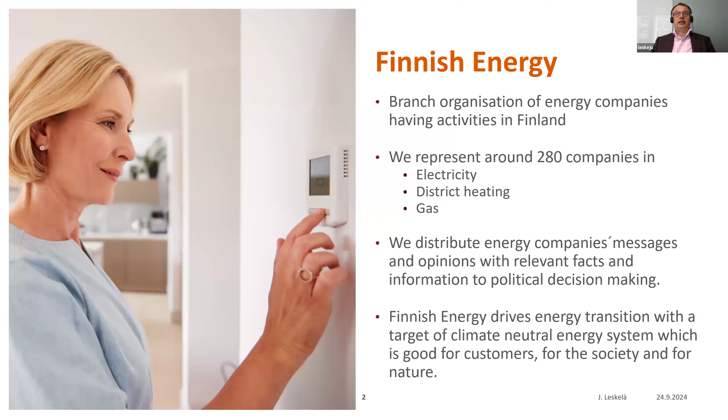As Henna told, I represent Finnish Energy. We are not a company, we are an association of companies having energy activities in Finland—in electricity generation, distribution, sales, or in district heating, or in gas. There are a lot of companies like that in Finland, many municipal, some state-owned, some private. There is a market in these issues in Finland, and we are the voice of this industry in our society.

What we do is we aim at driving the energy transition in Finland so that we will have a sustainable, carbon neutral energy system, and we tell our opinion, or the companies' opinion, to the decision makers in order to facilitate this transformation. I was asked to give a short overview on how we see the energy transition in Finland, what are the steps, and then the other speakers will talk more about waste and the energy use of waste.

But first of all, I really feel honored to speak with Ukrainian colleagues. Our organization fully supports you in your trouble with the massive attack of Russia. We in Finland had a lot of energy trade with Russia—about one third of our primary energy came from Russia at the time when Russia attacked Ukraine in February '22. Now we have cut totally these imports. There are no more Russian energy imports to Finland anymore. I would say Mr. Putin has done this forever, because we are going to phase out fossil fuels before we can have relations with Russia to trade anymore. Nobody wants to have Russian energy back in our system in Finland.

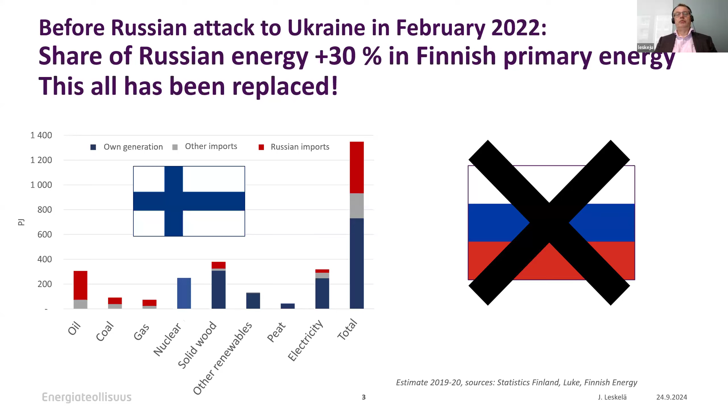Our companies are also providing a lot of equipment to Ukraine, and we are at the moment running a campaign in order to collect as much material as we can find for replacing your damaged energy systems in Ukraine for the next winter. I hope this will help. We understand very well here in Finland what it means if you don't have available energy or electricity in your country during winter, and we really hope you can get things fixed with the energy system.

But to the energy transition—what does it mean? Finland as a country has a target that we should be carbon neutral as a society, as a country, by 2035. So in 11 years' time, which means we still have some emissions, greenhouse gas emissions, but our net sinks—the growth of the forest and so on—will cover these emissions. We are on a pathway to that. It's a very tough target, but our country has taken this kind of target, and our energy industry is fully supporting it.

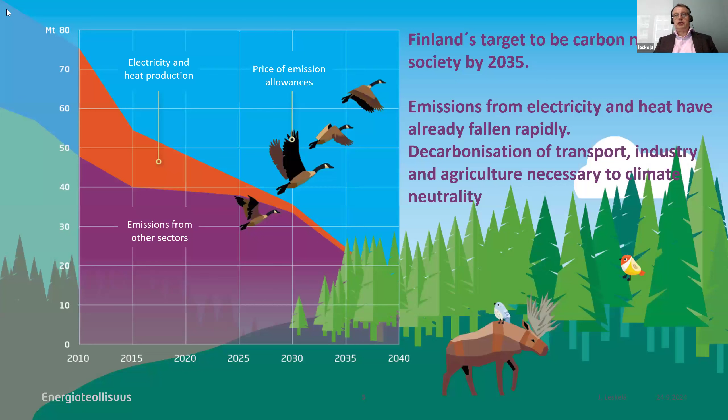Now, here we go. Yes.

How we see the decarbonization of the energy system and getting rid of fossil fuels in the whole energy system, I call it a triple jump. The first jump is to decarbonize the energy production, electricity production, heat production, and that step we have mainly already taken in Finland. The second jump is decarbonizing the energy use, especially in transportation, in industry, and in heating, but also in agriculture and so on.

The method to do that is to electrify the energy use, so that we produce more clean electricity with renewables like wind and solar, or with nuclear, in carbon neutral ways, and use electricity in the energy consumption instead of fossil fuels, like having electric vehicles instead of fossil fuel combustion engine cars, and also in industry.

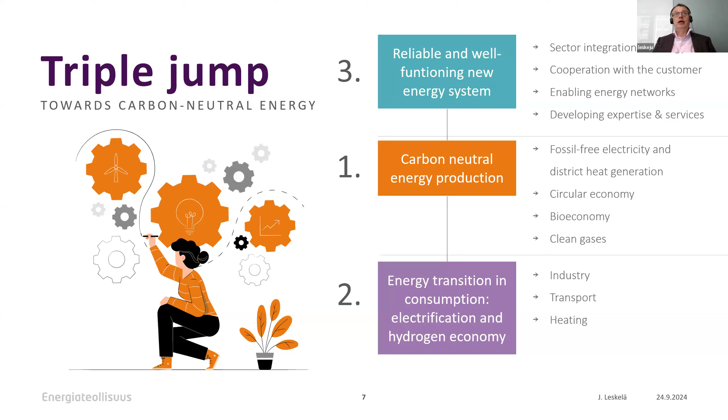And we are very happy with that, but it is still ongoing. Today, the emissions are even lower from the power sector.

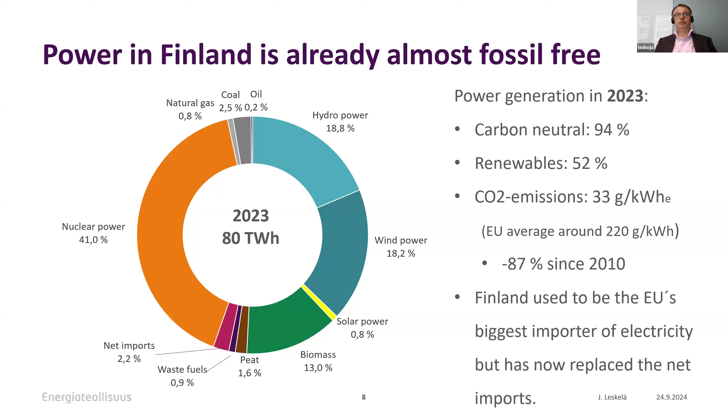And then the heating sector in Finland, the homes, public buildings and commercial buildings, they are heated mostly with district heating systems. Almost half of the cubic meters of all buildings in Finland are district heated. And then there is electrical heating and heat pumps, which both use electricity as a primary energy source. If electricity is already clean, then of course the electrical heating and heat pumps are clean. Then we have a little bit of wood, which is of course renewable, and a small share of fuel oil that will be replaced with other sources.

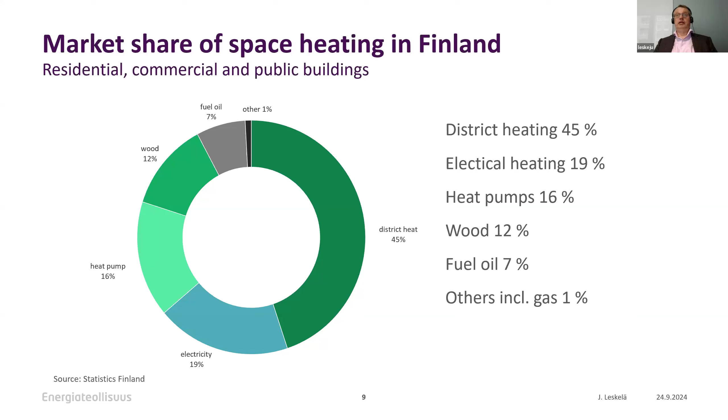And if the district heating will be decarbonized, then also the heat in all Finland would be decarbonized. There is also a tremendous development that has happened during the last decade. We have reduced the amount of fossil fuels tremendously, so that the share of natural gas and coal and oil together is only between 15 and 20% last year. And then we have a little bit of domestic peat, which will also be mostly phased out during coming years, like all these fossil fuels.

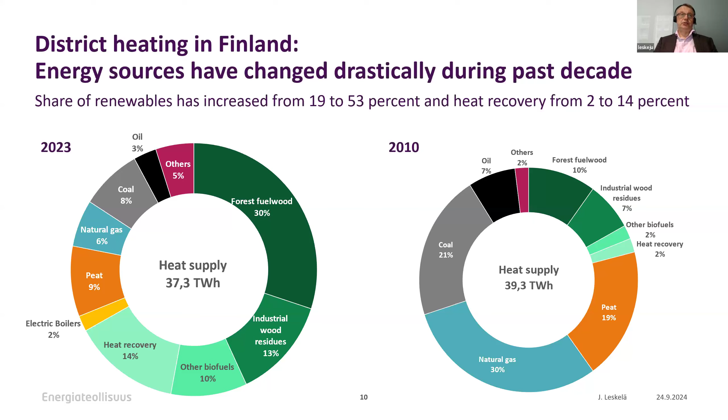And by the end of this decade, by 2030, practically the heating is also carbon neutral in Finland. And then we have clean electricity and clean heat in Finland. These others in the picture are the non-renewable share of the waste incineration, and that shows that the share of waste in our district heating is altogether something like 10%. Half of it is counted as renewable and half as non-renewable.

And our estimate is that the emissions from the energy sector, from the power and heat sector, will go to zero or negative by 2035, and we are very well on that track already.

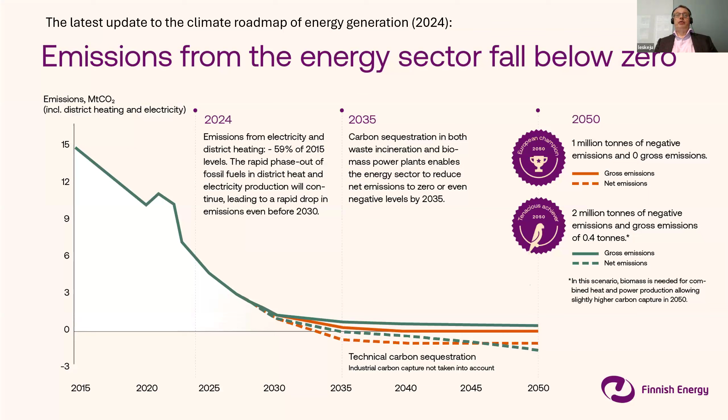And the good point of this is that it has not appeared to be tremendously expensive. On the contrary, in Finland and in other countries that are already carbon neutral in the electricity system, they have the lowest power prices in Europe. So where you have as little fossil fuels as possible and a good functioning electricity market, there you have the lowest price, like in Scandinavia, in the northern countries, and in Iberia.

And while we have this clean electricity, which is competitive in price, the good point is that we can still increase tremendously the generation of that clean electricity, either with wind and solar and nuclear.

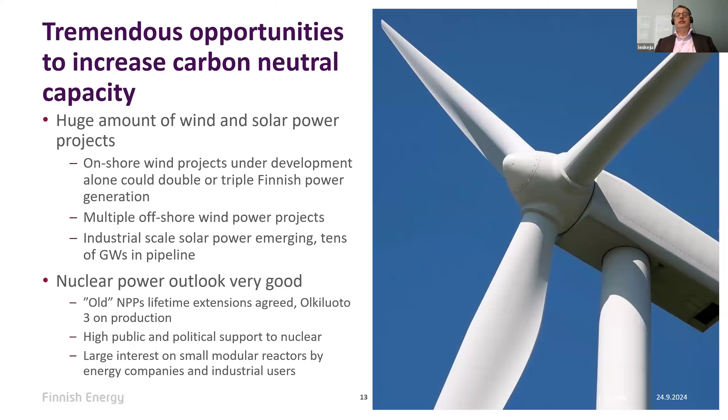It means that we have a lot of clean electricity available, and there is a lot of interest from industry to invest in Finland for clean production. There are a lot of companies looking for green steel production, green ammonia production, or e-fuel, electricity-based, hydrogen-based fuel production.

And these industries are now looking where to invest their factories. And of course they are looking to Finland and also to Sweden, because we have clean electricity available. This is what I wanted to say about the transition. It may sound costly because you need a lot of investments, but it will open new opportunities for the countries to have new kind of industry, new kind of industrial production, jobs, and welfare for the country. And this is how we see that this will benefit our society.

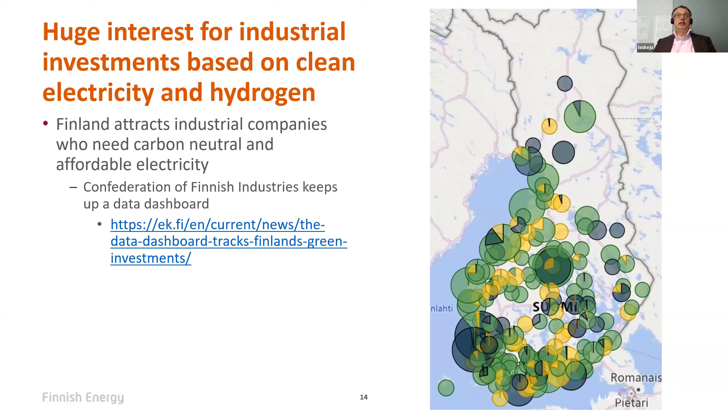We believe that can happen in any European country, but it will of course need a lot of work and will take a lot of time. I personally believe that whenever Ukraine will be ready to really start the country again, hopefully after winning the war, then I really hope that we all can support you to create a clean energy system when reconstructing the country. That was more or less my message. The climate neutral energy system is possible, and it is also a great opportunity. Thank you very much.

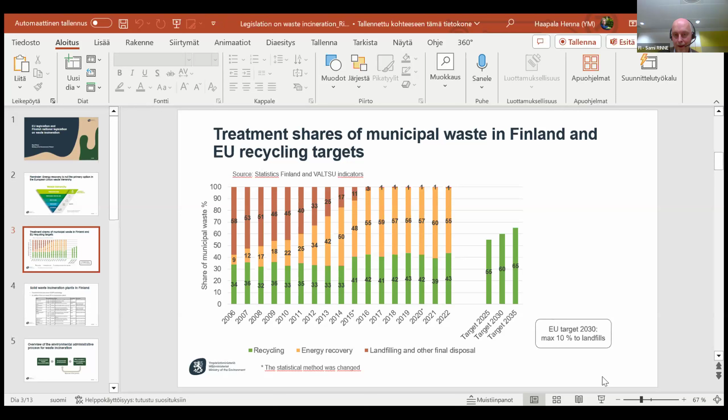So, as I said, this is from the year 2006, the treatment shares of municipal waste in Finland. The green color is recycling, orange is energy recovery of municipal waste, and red is landfilling. You can see that from 2010 onwards, the share of energy recovery was growing really fast, and nowadays more than half of our municipal waste is used for energy recovery, and only about 1% goes to landfill. You can also see that the EU targets for recycling will be a big challenge for us in the coming years.

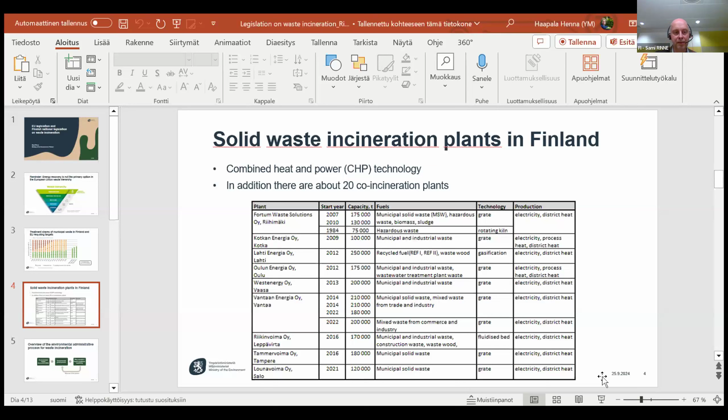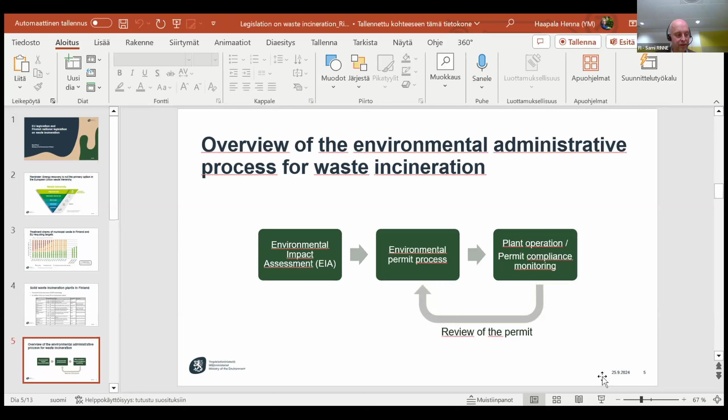Here is a really simplified overview of the environmental administrative process for, for example, waste incineration plants. First, you need an environmental impact assessment. After that, there's an environmental permit process, and if a permit is granted, the plant starts operating, and the authorities will monitor that it complies with the permit conditions. In some occasions, the permit must be reviewed, for example, if there is a substantial change in the activity.

It's a very extensive process, and it goes through various impacts on the environment and on humans. The process contains public hearings, and basically the impact assessment is meant to be used also as an information source and help for planning and decision making when one is planning a new plant. For example, in the assessment you might consider different locations for the plants and so on.

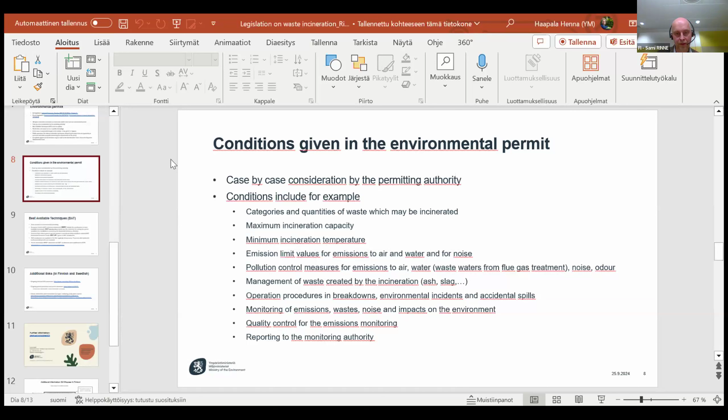There are also conditions concerning the procedures in possible breakdowns or environmental incidents or accidents, and conditions on monitoring of emissions. That means also monitoring of wastes produced, and noise, and impacts on the environment, conditions about the quality control of the emissions monitoring, and about reporting to the monitoring authority. So this is not an exhaustive list, there are just some examples.

A little bit more about best available techniques. Some of you may be familiar with the concept, but it's really a core concept in the environmental permitting in Finland and in the EU.

What we use are the so-called BAT reference documents, BREFs, that are compiled in the EU, and they include so-called BAT conclusions. These BAT conclusions are the reference for setting permit conditions in installations that are covered in the Industrial Emissions Directive, and this means all the waste incineration plants. For example, when giving emission limit values in the permit, the emission limit values cannot be higher during normal operating conditions than the BAT associated emission levels given in the BAT conclusions. So the BAT conclusions are really important when giving a permit.

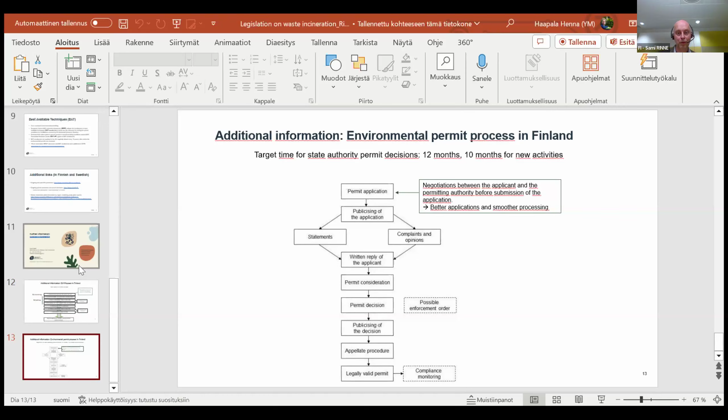But now if you can go back 2 slides, this is my finished slide. Thank you very much for your attention, and if you have any questions, I can try to answer them now or later.

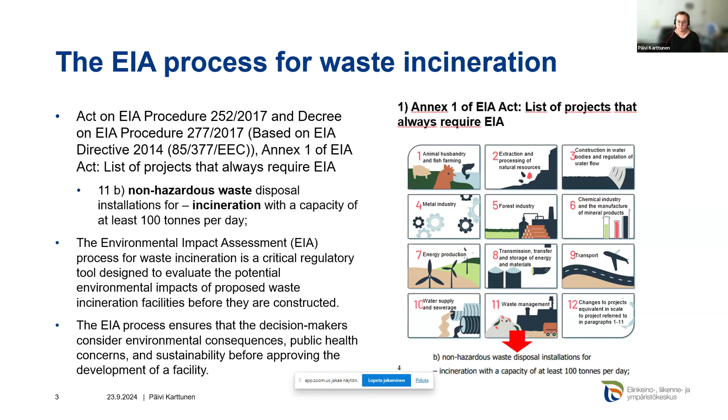Then a few things about practical implementation. The project developer is responsible for the environmental impact assessment and studies, but the project developer can order the impact assessment and EIA studies from a consultant, and the consultant carries out the expert work.

ELY-Centre is the competent authority in the EIA process and supervises the EIA conducted by the developer, gives a statement on the EIA program, and gives its reasoned conclusion on the EIA report.

And nowadays, pre-negotiations in collaboration with the project developer and central authorities are important for advising, harmonizing procedures, sharing information, and setting timelines. These pre-negotiations are held usually before the EIA program, but are also held when needed. There's a big list of central authorities which are in collaboration with the project developer and this competent authority.

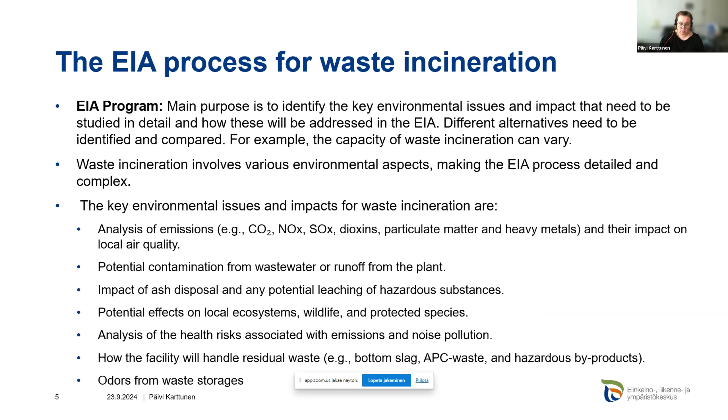Here is a short representation of what the EIA process includes, like baseline study, EIA report, and the competent authority's reasoned conclusion.

Waste incineration projects often face opposition from local communities who are concerned about air pollution and human health risks, and also impacts on property values. That's why I think air quality and dispersion model calculations have great importance.

It involves assessing the concentration and spread of pollutants in the air using mathematical models to predict their distribution and impact on the environment and public health.

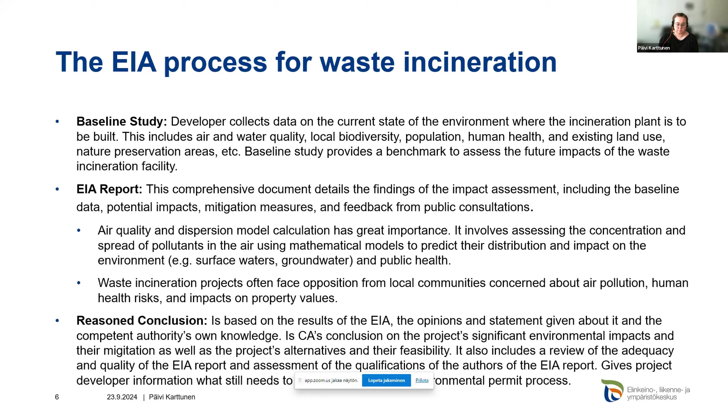After the EIA process, it's time for environmental permitting. The regional state administrative agencies, AVI, handle and resolve environmental permits in accordance with the Environmental Protection Act. And there are 2 ways when an installation has to be permitted.

So there is the directive on industrial emissions, like these installations covered by the directive, and then other installations.

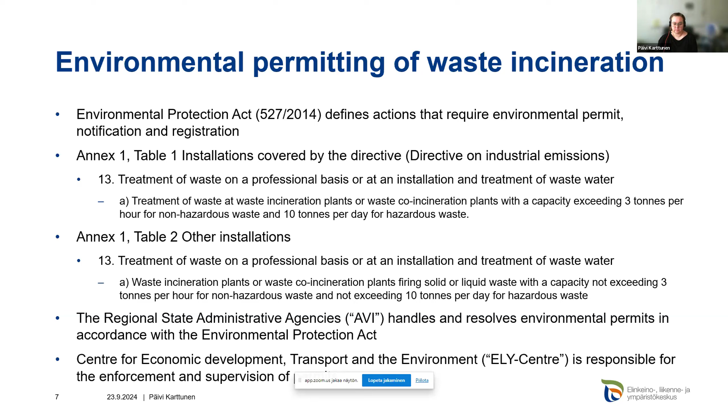Environmental permitting ensures that waste incineration facilities comply with environmental laws and operate in a manner that minimizes harm to the environment and human health. The application includes detailed information about the facility's design, waste types to be incinerated, emission control technologies, and monitoring plans.

An incineration plant must meet the requirements of the directive on incineration of waste and the BAT reference document for waste incineration, like Sami said. Reasoned conclusions of EIA must be considered in permitting. The authority may not grant a permit for implementation of a project before it has obtained the EIA report and the competent authority's reasoned conclusion. During the permitting process, the public and relevant stakeholders are given the opportunity to provide feedback on the proposed facility.

After that, the permit authority assesses the facility's proposed emission limits, waste handling procedures, and whether best available technologies are being used to minimize pollution. If the permit authority is satisfied that the incineration plant will meet all environmental and safety standards, a permit is issued with specific conditions. These conditions typically include emission limits, requirements for continuous air quality monitoring, and proper ash disposal protocols, like Sami said before.

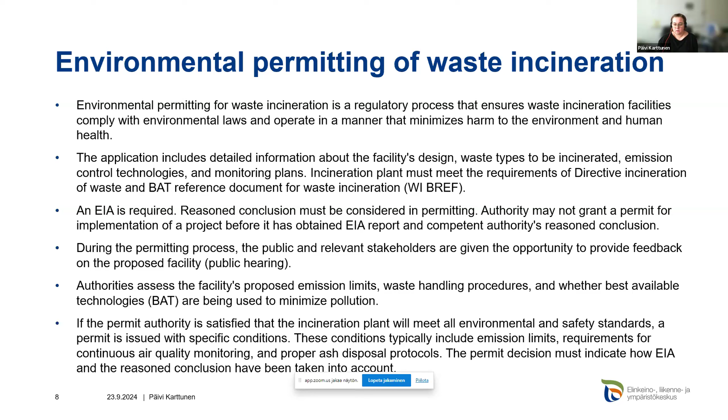Before starting waste incineration, there are a few things that must be submitted to the supervisory authority. One is a plan for the final technical structure of the flue gas cleaning system and the chemicals to be used, and the supervisory authority reviews and approves the plans. Before installing air emission measurement equipment, a report demonstrating that the measurement methods planned for measuring emissions comply with the waste incineration regulation must be submitted.

A statement from an independent expert institution on the conformity of the measurement equipment with the regulation and the suitability of the measurement locations must be attached to the report. The authority supervises that the construction and commissioning of the plant, environmental protection structures, and the emission treatment and monitoring systems are implemented in accordance with the environmental permit and legislation.

After that, the plant must use continuous monitoring equipment for emissions to air. The measurement equipment must be calibrated using parallel measurements after commissioning, and the calibration must be repeated every 3 years. Inspection tests of the measurement equipment shall be conducted once a year. Any exceedance of emission limit values shall be reported to the supervisory authority immediately, and if necessary, the incineration of waste must be stopped if the emission limit values are exceeded.

It is also mandatory that all facilities that cause air emissions and are required to have an environmental permit participate in regional collaborative air quality monitoring. Municipalities have the obligation to ensure the necessary monitoring of environmental conditions required by local circumstances and to secure good air quality in their area using available means. In practice, municipalities together with industry are responsible for implementing air quality monitoring in one or more municipalities. This includes both monitoring defined in the environmental permits of the facilities and the supervision required by air quality regulations.

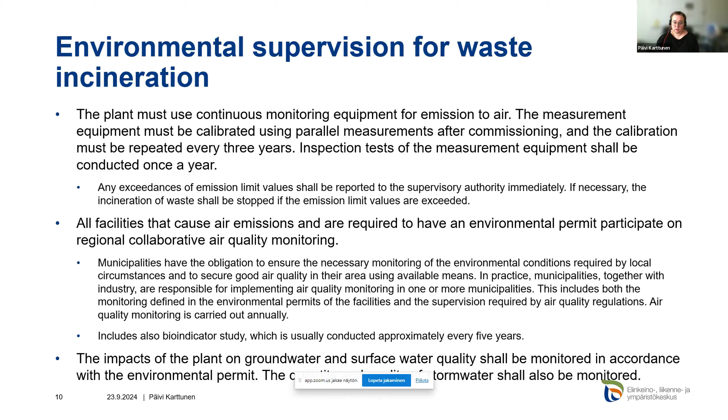The authority supervises the emissions of the waste incineration plant into the air and the amount of waste incinerated monthly. Other emissions are mainly supervised on an annual basis. The inspection of the facility is primarily carried out once a year, and the inspection includes a review of emission measurement reports and operational disturbances. The supervisory authority can follow the emission load of the waste incineration plant over different years using a reporting system.

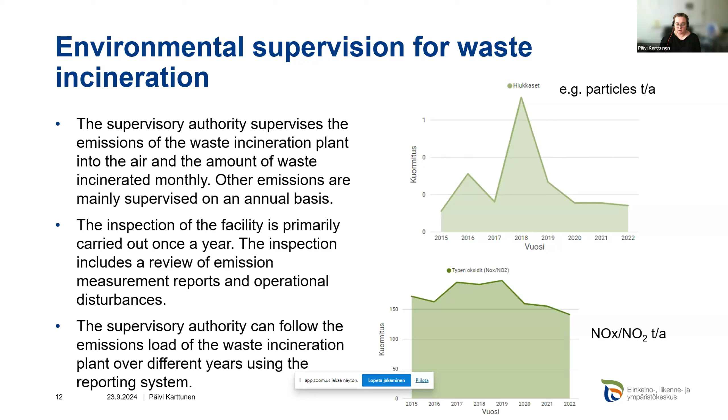Now I will say a few words on the benefits and disbenefits of waste incineration. As a supervisory authority, I think that the benefits of waste incineration are that waste replaces fossil fuels in energy production and carbon dioxide emissions are reduced. Landfilling reduces significantly, so methane emissions from landfilling are reduced, and bottom slag or bottom ash becomes renewable material, using the mineral fraction to replace natural sand and gravel.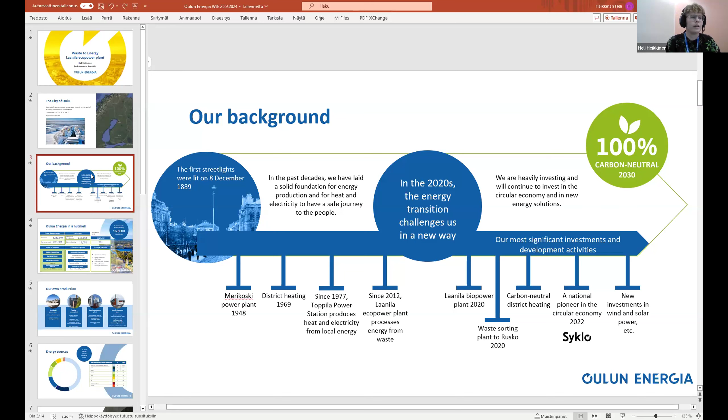Something about Oulun Energia: our areas of business are energy production, energy services, circular economy, and electricity network services. Our customers - about 160,000 people live in district heated homes in Oulu. And also we have lots of customers in electricity distribution.

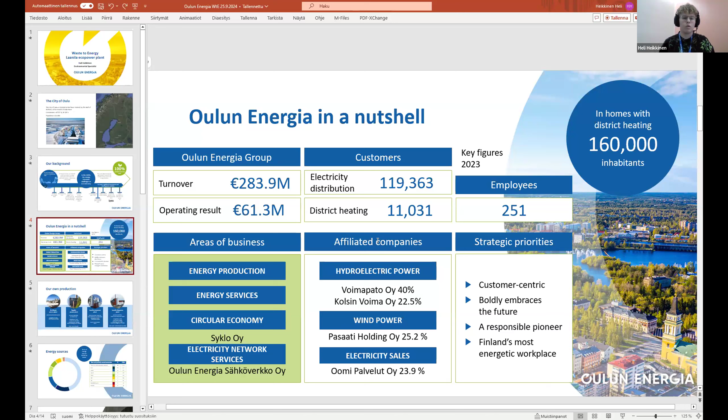We also partly own hydroelectric power and wind power, and now we are building solar power on our own. We have 4 running power plants: Merikoski hydroelectric plant, and Toppila 2 power plant, which is a combined heat and power plant using wood and peat. We are going to stop using peat in this energy production next year, and waste is a very important part of that.

Then we have 2 power plants in Laanila Industry Park in Oulu: this waste-to-energy plant, the eco power plant, and the new biopower plant, which is a combined heat and power plant that uses fuels like wood and SRF fuel. I saw that you have many questions about this SRF. I didn't include that much in my presentation, but I can try to answer questions later on.

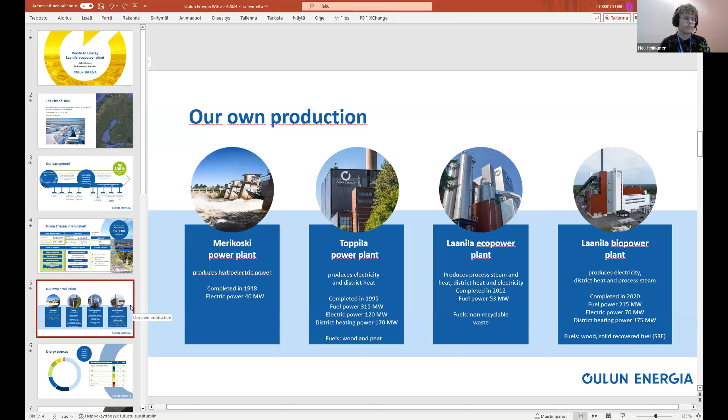In Oulun Energia, this is last year's figure: our main source of energy for now is wood and other solid biomass fuels. Last year we used 15% peat; this year it will be less. Waste - this SRF - and wood are about 18% of our energy used, so it's very important for us now.

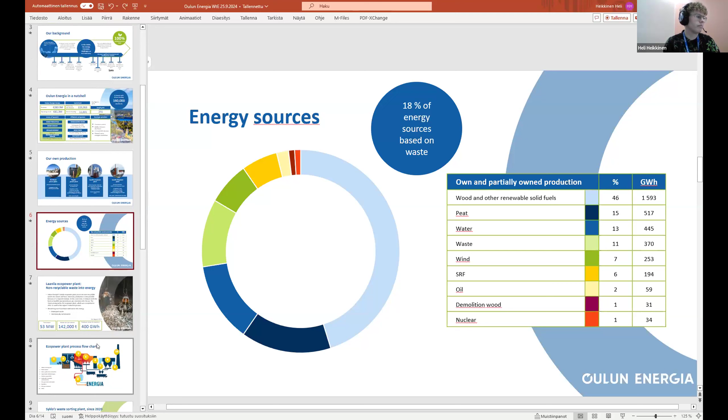So our eco power plant is a recovering plant, and we use this non-hazardous solid waste as a fuel. There are many this kind of plants in Finland, as we saw earlier, and we use about 140,000 tons of waste every year. The capacity is slightly bigger than that.

The power plant is running year round. We have 2 maintenance breaks, and the main purpose of the plant is to produce process steam for the industry. But we can also make district heating and electricity. And it's good to have different kinds of use for the electricity, so that we can make this plant successful.

When we started 12 years ago, we used only municipal waste sorted in households, coming straight to the power plant. But today we are using more and more mechanically sorted waste, which is rejects from the waste sorting plants.

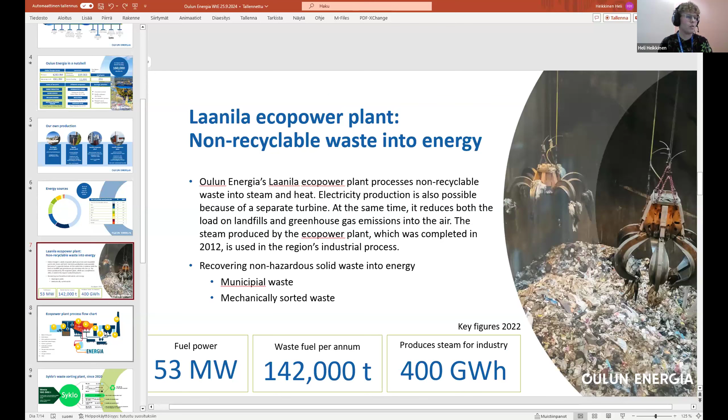It took a long time to get an environmental permit for this power plant. People were very concerned about the environmental impacts of it. There were three main things. First was, what will this plant do for the recycling targets? Second was the smell - will it smell? And the third was air pollutants - are they harmful for people living near the plant?

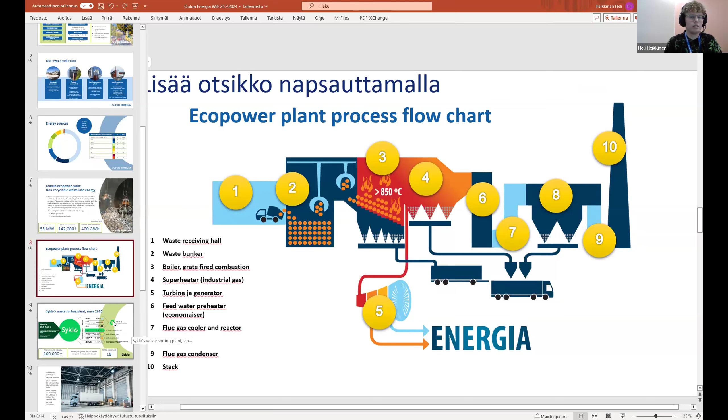I will talk more about how we have managed these concerns after the plant has started. First, when the EcoPower plant started, the amount of waste going into landfills reduced about 60% in Oulu.

And the waste replaced coal and peat in energy production. So the impact for climate was positive back then, but it didn't do much for the recycling of municipal waste or any other waste in Oulu.

So we started to plan a waste sorting plant and also a new power plant that can utilize this SRF fuel. The waste sorting plant and this new power plant started operating in the same year, 2020. And we are trying to sort the waste before utilizing the non-recyclable waste in energy production.

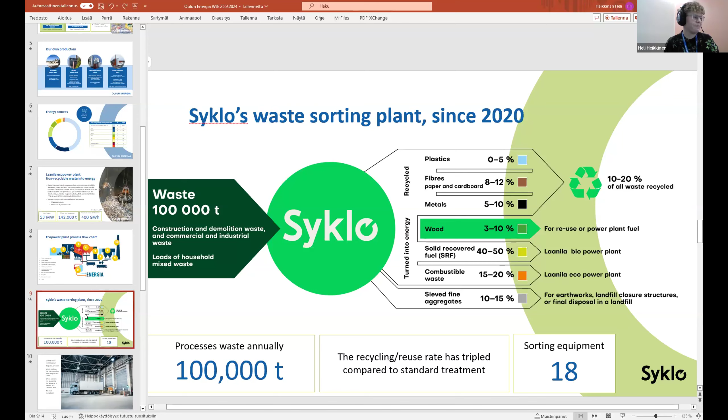Then I can tell about the smell, how we manage odors from municipal waste. The waste in the eco-power plant is received in a closed waste hall. It has negative pressure, and the waste air from the hall is used as burning air in a boiler. When the boiler is not operating, the waste air is treated in a chemical filter. We have had no smell complaints while operating this plant.

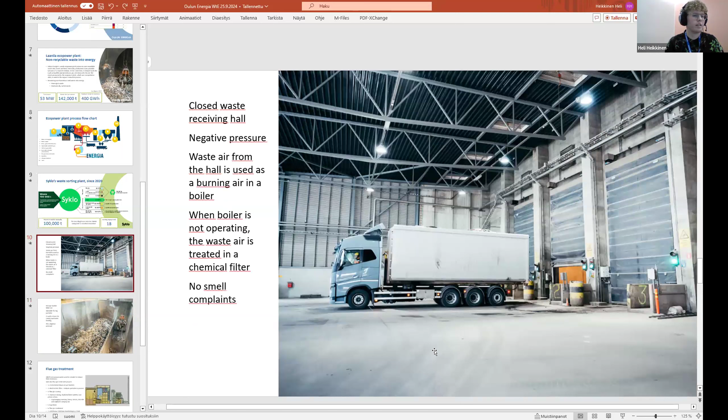This area also has negative pressure, and the waste air is treated as I said before. It's been working well - there hasn't been any smell complaints about our plant.

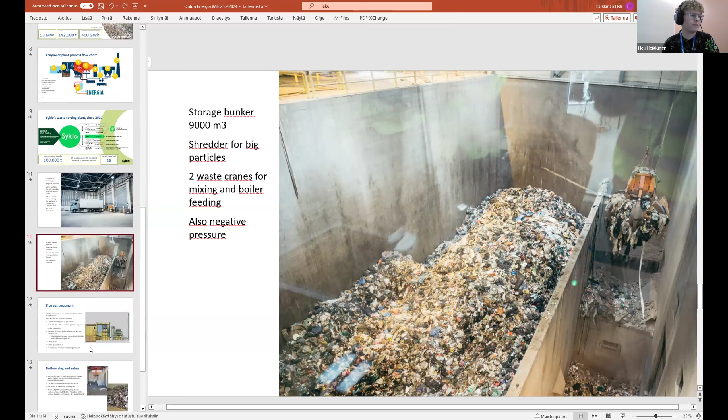Then about the flue gas treatment and air pollution. We have many processes here - in the eco power plant and also in the bio power plant, it's the same kind of system. We have SNCR to reduce NOx emissions, and then we have a multi-stage flue gas treatment.

We are taking the energy and utilizing it in burning air and also in district heating.

Then we have electrostatic filter. It doesn't do much for the air pollution, but it reduces particles in this flue gas treatment process, and it can reduce our maintenance costs in flue gas treatment.

Then we have flue gas cooling. It has to be cooled for the chemicals to work properly.

We have chemical dosing. We use hydrated lime and active carbon to capture heavy metals and other harmful substances from the waste burning.

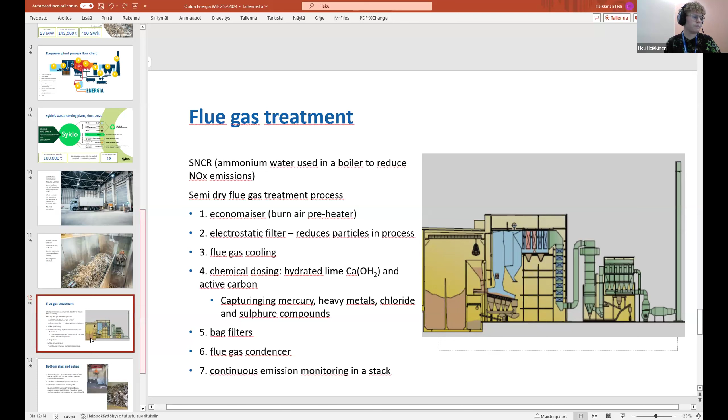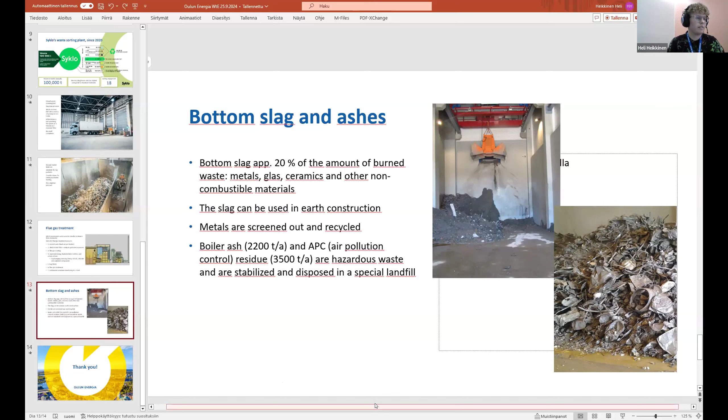Metals are screened and recycled, and the slag can be used in earth construction. Other ashes are hazardous waste, and they are stabilized and disposed of in a special landfill in our power plant also.

So thank you. Hope this answers some of your questions.

Thank you very much, Heli. Indeed, this was very important to hear your presentation about how the incineration plant operates in practice and how you have solved the different issues that are very, very important and topical now in different parts, not least in Finland, but of course in Ukraine in this case.

I would now like to propose that we proceed to the next speaker and take all the speakers first, then continue with questions and answers. I'm sorry, Hanna. Yes, there is one question from the Department of Ecology of Dnipropetrovsk Oblast. Okay, they asked me to read this question because they have some technical problem.

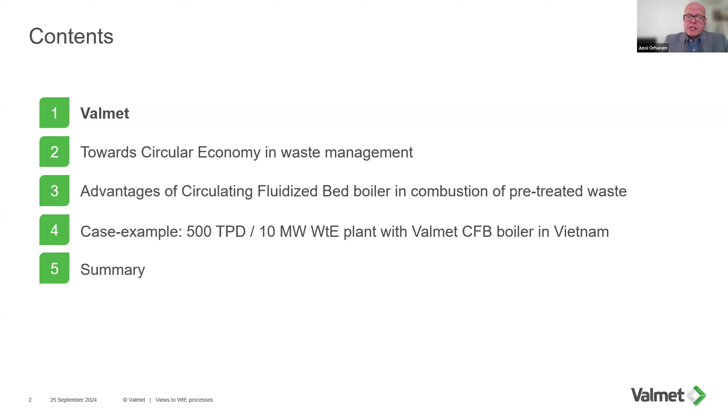This is the content of the presentation: a few words about Valmet, then our views about steps towards circular economy in waste management. I talk about Valmet's viewpoint here, then advantages of circulating fluidized bed boilers in combustion of pre-treated waste, one case example, maybe some other case examples also, and then a summary at the end.

Valmet is a leading provider of process technologies, automation and services for pulp, paper and energy industries. We have a unique offering combining process technologies, services and automation. Our net sales last year was about 5 billion euros. And we are a technology company, so we put quite a lot of money every year into research and development to develop products for our customers.

We aim for market leadership in all the segments where we work: pulp mills, energy sector, board, tissue and paper making, services and automation. We have a global presence, about 19,000 employees, and we are a leader in sustainability, being listed for 10 years in a row in the Dow Jones Sustainability Index.

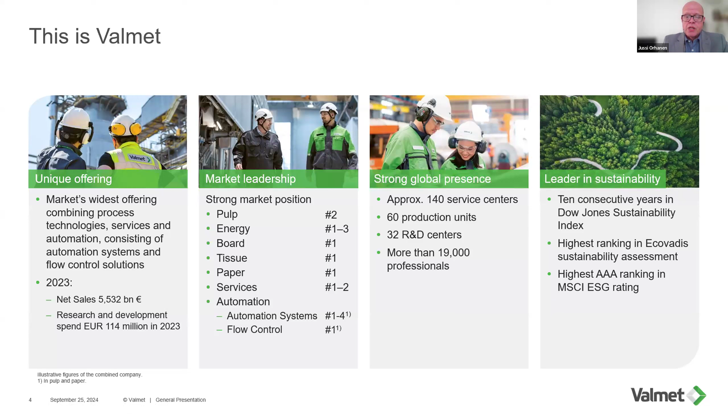In the energy sector, we are the leading supplier of biomass and multi-fuel boiler plants globally. Our energy business unit is focusing on multi-fuel fired fluidized bed boilers and gasifiers, as well as flue gas cleaning systems and fuel upgrades for existing boilers.

Here you can see some recent references. An example from Japan: a multi-fuel fired power plant with a CFB boiler, 75 megawatts electricity, burning biomass and coal together.

Example of biomass conversion: an existing coal-fired power plant converted by us to replace some of the coal with locally sourced biomass. And an example of waste-to-energy plants, the Mälarenergi plant in Västerås, Sweden. This is actually the world's biggest single-line waste-to-energy boiler, burning RDF, refuse-derived fuel, 400,000 tons per year. So this is a very big boiler.

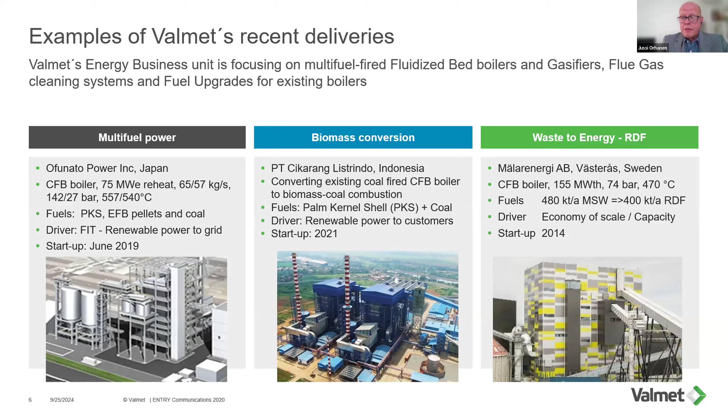Another reference I just picked from our reference sheets during the previous presentation: the Laanila Oulun Energia biopower plant boiler from 2020, made by Valmet. It's actually a real multi-fuel boiler, combusting biomass, peat, and solid recovered fuel, all in the same boiler. The flue gas cleaning system is from Valmet as well.

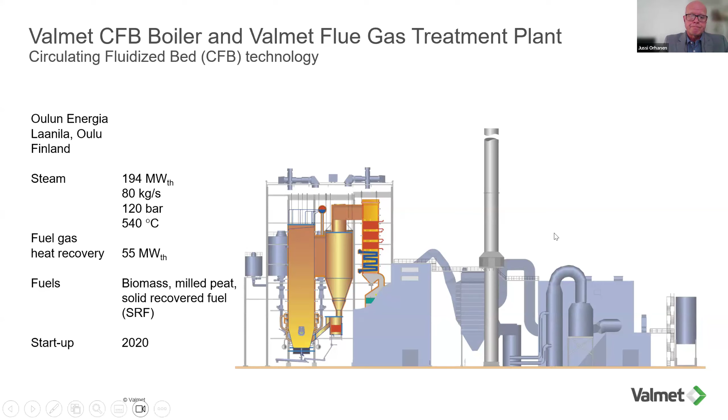Now our views in Valmet about circular economy and how waste management is part of that. This transition towards circular economy is a mega trend that affects all societies and all businesses. In circular economy, only the residual waste is available for energy recovery, as we have learned today also many times. And this transition towards circular economy is changing the quantity and quality of this residual waste over the years.

Like we heard today, in Finland we are a little bit in the situation that the capacity we have built for waste incineration is actually restricting us from reaching the recycling targets, because the incinerators are in need of waste. In Valmet, we think that any smart waste-to-energy solution built today towards circular economy must have high efficiency, must have low emissions, but it has to have flexibility to adapt to the changes in residual waste composition and quantity over the years to come.

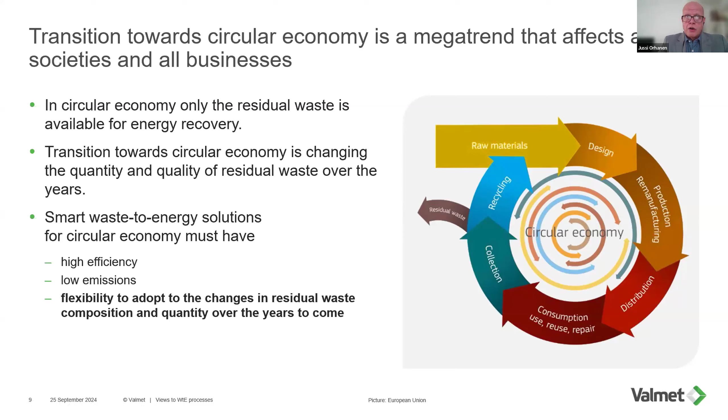So it has to be built so that it is ready for changing quality and quantity of the residual waste over the lifetime of the plant. The evolution of waste management goes from landfill through waste incineration, through energy recovery, and then finally through resource and energy recovery towards circular economy with full material recycling and chemical recycling. Technologies today are developing to move away from dumping and destroying waste towards recovery and chemical recycling.

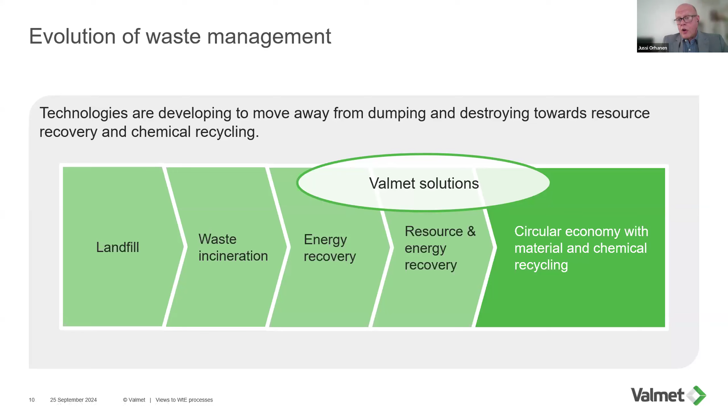Valmet solutions - we are not making waste incineration plants, so our solutions focus on supporting the road to circular economy. We start from maximized energy recovery and are developing processes for circular economy and chemical recycling. We see that pre-treatment of residual waste is the key to resource efficiency.

The waste, different waste streams from municipalities, from industries, and from commerce, have to be pre-treated to be turned into proper feedstock for chemical processing and for energy use as well. In our boilers and gasifiers today, we see waste streams coming in: recycled wood, municipal solid waste as feedstock, industrial waste, paper waste, paper mill rejects. We see fossil side streams from the oil and gas industry, pulp and paper industry byproducts, and agricultural byproducts.

The common denominator to be able to use those in a smart way is the pre-treatment. Pre-treatment is typically nowadays either mechanical processing, sieving, separating inert materials and metals, and also sizing the material to the right size for proper combustion and gasification processes. Some chemical processing can also be done.

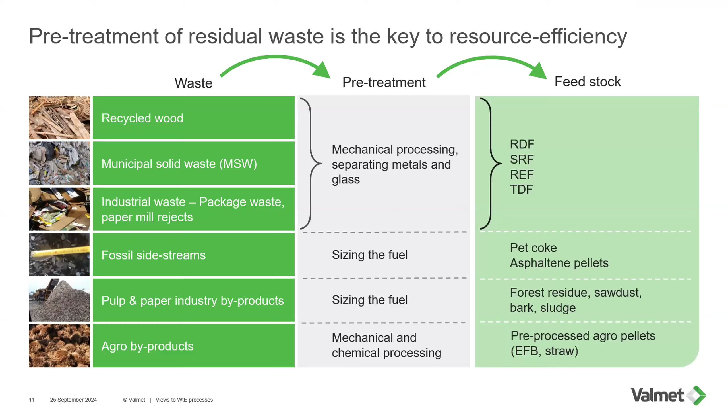Yes, this is an example. This is a typical setup for this kind of mechanical pre-treatment line, which also Laanila Ecopark has, from different suppliers. This example is from a Finnish supplier, BMH Technology, which we quite often see in front of our waste-to-energy boilers.

Municipal solid waste and industrial and commerce waste from different sources are taken into the mechanical pre-treatment line, where there are shredding modules, screens, magnets, and air classifiers to prepare the final RDF. It's kind of SRF, but more coarse and not as classified, but CFB boilers can use this just fine.

Then this RDF - you asked about control of the calorific value - you can actually control the calorific value of the RDF by controlling the pre-treatment and the in-feed. So if you have several sources for the waste streams, you can mix more high calorific value stuff with the lower calorific value stuff, and by that way control what is actually inside the RDF bunker going to the boilers.

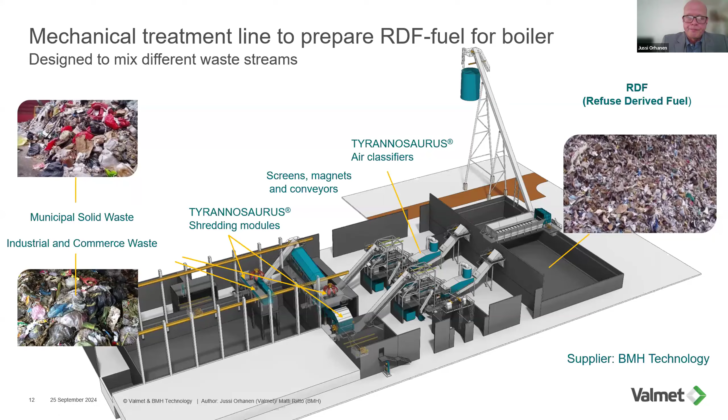Then this pre-treated and well-done RDF is conveyed to the boiler islands, and Valmet's scope typically in this project is a CFB boiler plant with flue gas cleaning and complete plant automation systems.

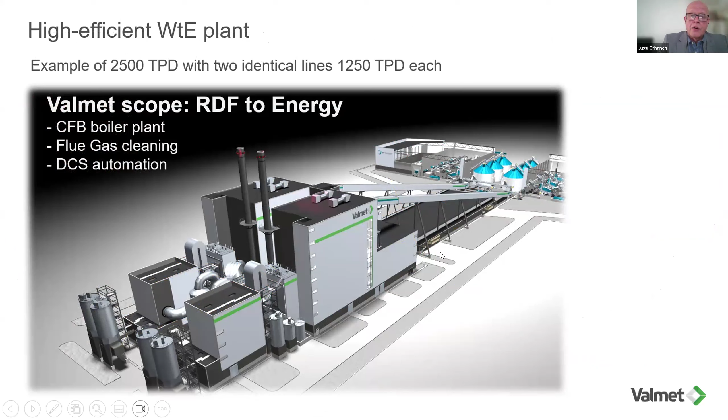When pre-treated waste is combusted and burned, CFB technology has superior advantages compared to any other combustion technology. Especially when you produce electricity, with this technology you can reach very high steam temperature and pressure, which means high electricity output. And if electricity has a good value, then it makes sense.

It has very high reliability, and excellent fuel flexibility. This circulating fluidized bed process by nature allows rapid changes in fuel composition, moisture, and calorific value, and it is very nicely controllable. So even with fast changes in fuel quality, you can control it so that emissions remain stable.

It also has a small footprint. It's lightweight, and has lower primary emissions than other combustion types, which means the consumption of flue gas cleaning additives is smaller than in other technologies. And it has a very wide capacity range with one single unit.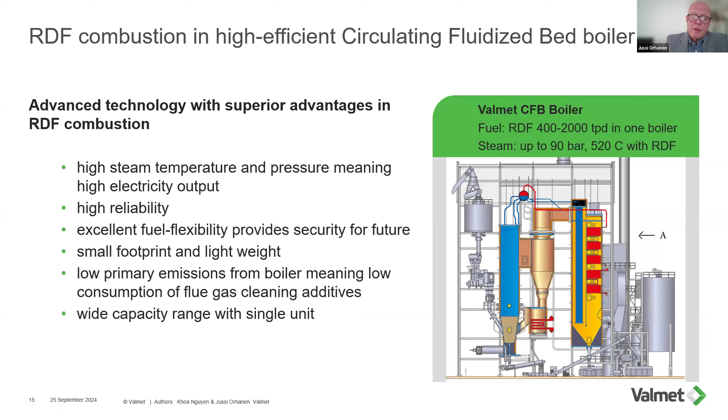The flue gas cleaning systems that we use after these boilers in waste-to-energy are this kind of semi-dry or conditioned dry type technology, where we control particulate emissions, acid gases, toxic gases, and heavy metals.

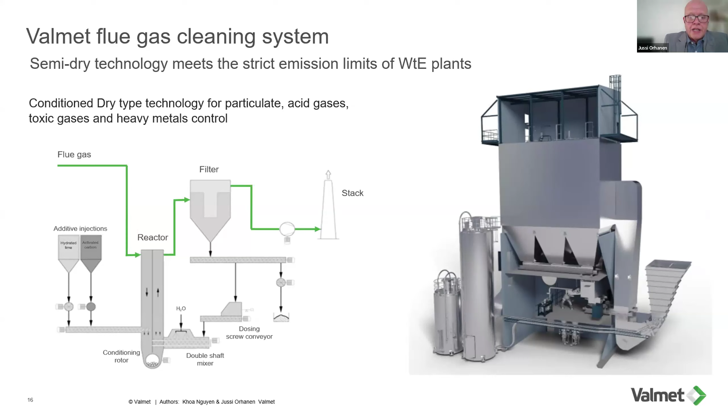It is really controllable by these additives that are fed into this flue gas cleaning system, and we have our own technologies for this as well.

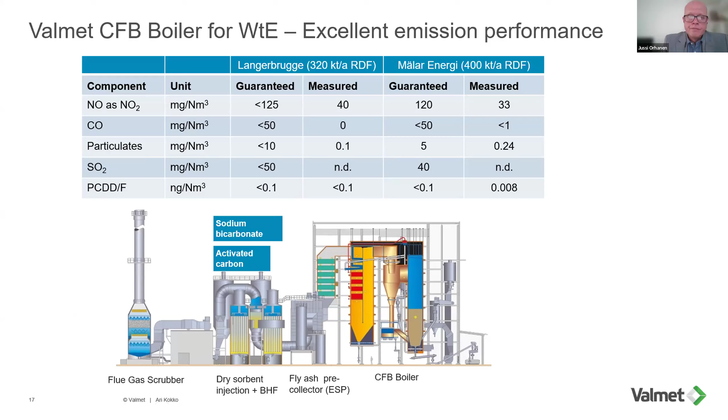Here are some recent references, you can look at these later. This is Mälarenergi, the big plant from Sweden that I already mentioned. There are two plant examples from China, recent references as well.

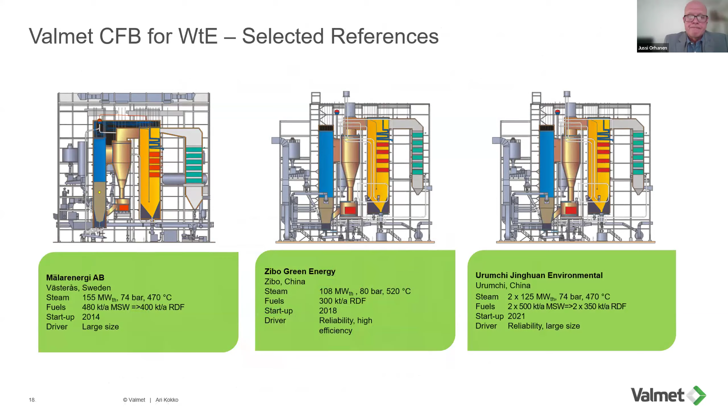The main driver for this investment is environment. There's a lot of landfilling and uncontrolled waste burning in that area, so they want to purify the air with this plant.

The government has set a feed-in tariff of $100 per megawatt hour for 20 years, which is attracting investors. And the municipality is offering 500 tons per day of waste treatment, municipal solid waste, for this investor.

They are refining value from this waste by treating 500 tons per day of municipal solid waste, and gathering 100 tons per day of industrial and commerce waste, mixing to keep the calorific value good at all times. Waste is crushed, cleaned, and mixed to a homogeneous solid fuel for a modern circulating fluidized bed boiler. It produces 10 megawatts of electricity to the grid, and meets both Vietnamese and European emission norms, so you can run with both emission norms if you wish.

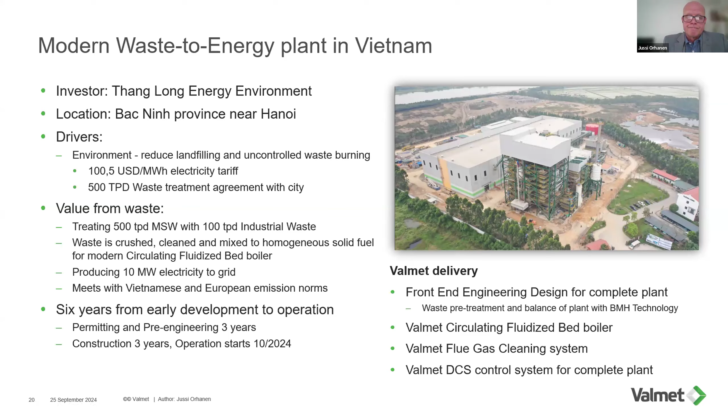And then finally a summary from my side. So how we see it in Valmet is that refining municipal solid waste and other residual waste from industry and commerce into RDF or SRF, if you wish, it is smart because it allows good material recovery in the RDF preparation phase, and it is supporting recycling instead of bottlenecking that.

And you can remove the metals before the boiler in this system, so sometimes it's not very smart to run the metals through the boiler. So it is actually protecting the boiler as well from things that don't belong in the boiler, and the boiler is very expensive equipment, so it's better to protect that.

Then RDF can be used in other applications while we go along towards chemical recycling. So it is in that sense supporting the transition towards circular economy in our view. And when burning RDF, it makes it possible to apply CFB boilers with high efficiency, so it fits well with local energy needs, especially if you need electricity locally. Advantages of circulating fluidized bed boilers in RDF combustion are high electrical efficiency, low emissions, low capex, and low opex.